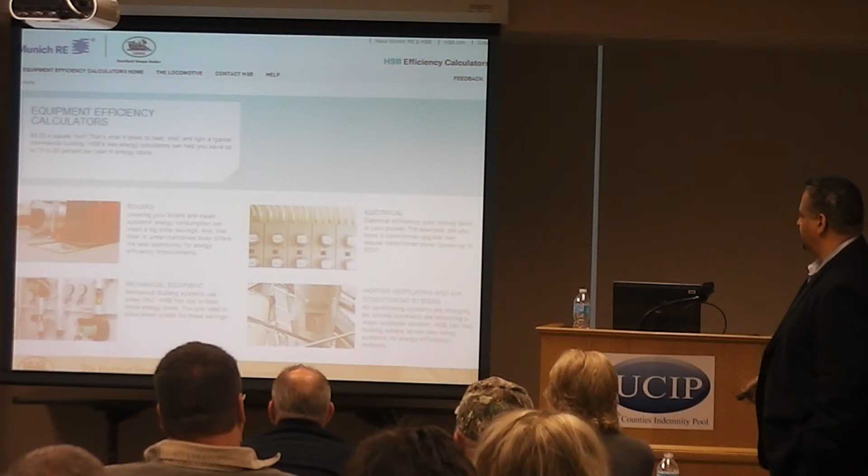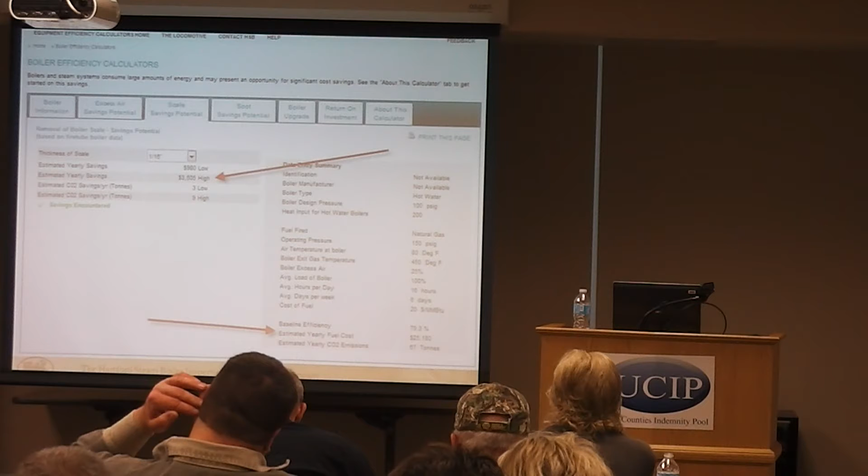And if you want to get some experience, just some idea of how much it would cost you, or how much you would save, you can go to one of our calculators and put in the information on the type of boiler you have, as far as fire tube, water tube, how it's being fired, on gas, on oil, whatever, design pressure, design temperature. If you fill that information in, you can actually start to see how much you might start to save just by knocking off the scale.

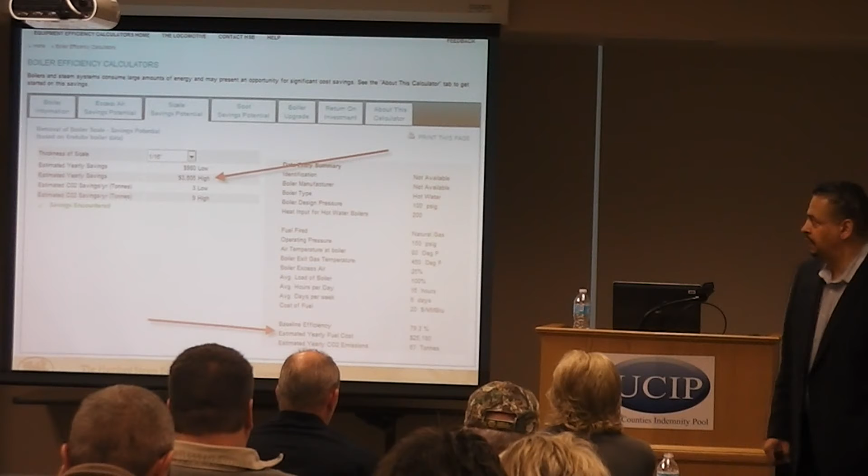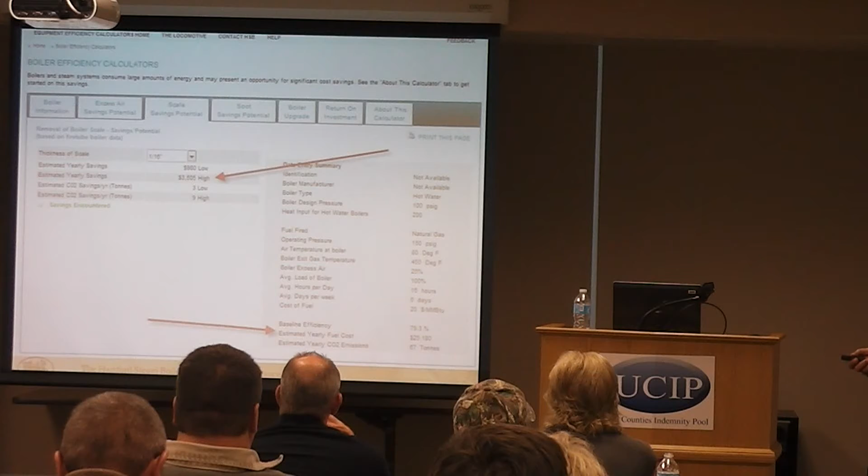All right, another type of failure: controls and safety devices. Some of our control and safety devices would be safety relief valves, low water cutouts. What else? High temperature limit switches, pressure switches if you have any type of steam boiler or anything like that.

Here's a safety valve. What's wrong with this safety valve? Remember all that scale that we saw on the tubes? That scale can also start to build up on the inside of the safety valve. Do we have proper over-pressure safety protection on this boiler now?

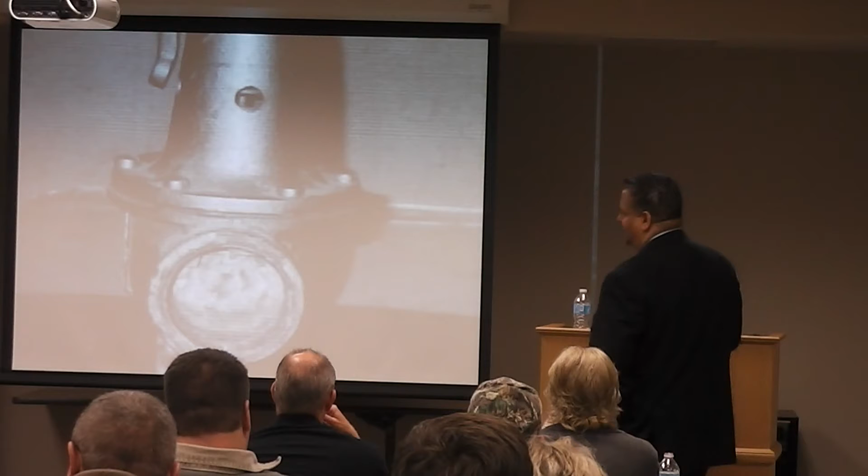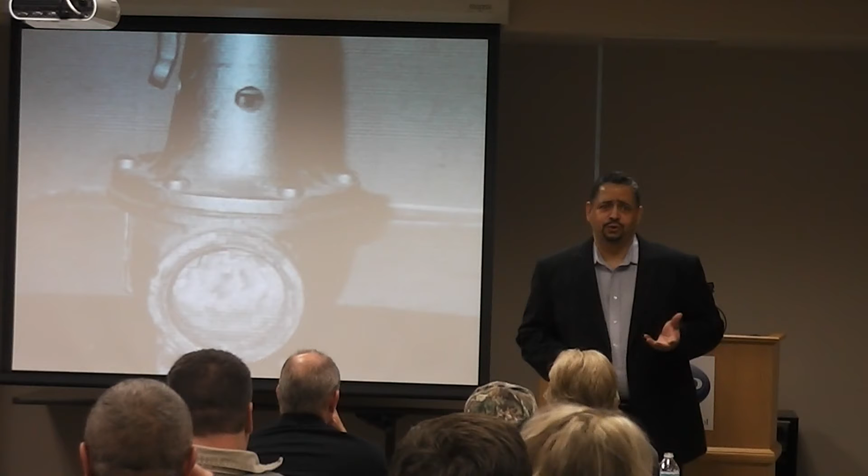And that's the one thing. If our inspectors come in and we do an inspection and we have some reason to believe that that safety valve is no longer operable, we're going to have to recommend that you take that boiler offline and replace the safety valve before you can bring it back up again. Because that is a serious safety concern. What kind of things can you do to try to help prevent that, to help minimize that?

Go ahead and pop that safety valve every so often. How many guys actually pop a safety valve at the facilities? Take the safety valve and lift it. We hear a lot of people say they don't like to lift them up, they don't like to test them because they never reseat. They start to leak after you pop them once or twice.

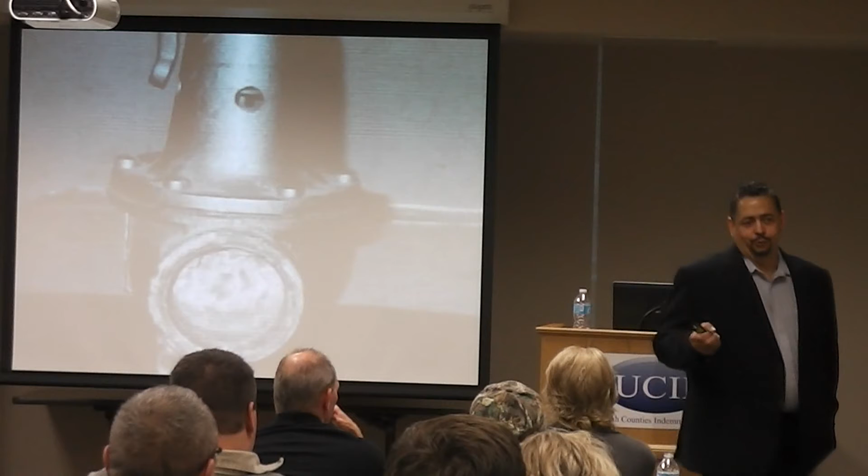Well, the reason it does that is because you never tested it to begin with. All that scale and crud starts to build up on the seat of the valve and the disc, so you don't have that good seating connection anymore. So of course it's going to leak. Well, if it leaked, it might not even work to begin with, right?

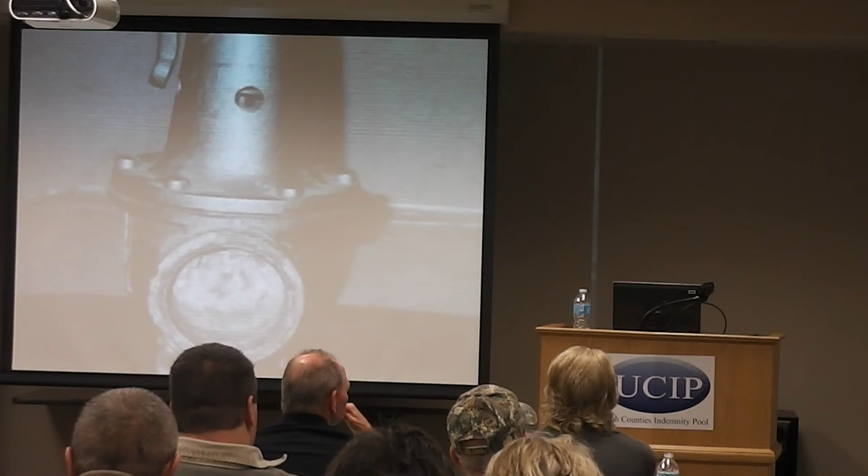How many guys have hot water heaters at home? You test those safety valves? When's the last time you popped those puppies? You said this weekend? It's kind of hard, but we recommend doing that. I recommend doing it like every 6 months. That thing can go just as bad - we'll see a video on that.

What's wrong with the safety valve? Well, what happened - we came in to do, we popped it, and it was leaking. We did the test on it, and it was leaking, and they told the mechanic to go down there and keep it from leaking. Well, they stopped it from leaking, okay.

Anybody recognize what kind of vessel this is right here? Yeah, hot water tank, hot water heater. Now, unfortunately, we had this situation happen down in Oklahoma City back in '82. It wasn't just like this - I mean this thing actually had a discharge line on it, and it was leaking. And the guy did the same thing - he went ahead and tried to keep it from leaking, and screwed a cap on it.

Unfortunately, something happened to the temperature switch, and this thing just kept building up pressure, and the safety valve tried to relieve itself. Now, this was at a school, in the cafeteria, and the whole tank finally let go right about lunchtime. And unfortunately, about 6 kids died from this.

So that's why, if we ever see any reason why a safety valve that we believe is not in operation or is not going to function properly, we will require you to take it offline and shut it down. These things are dangerous. I recommend, if you've got a discharge line - which you should have on these safety valves - point it off to a safe point of discharge. At the bottom of the line, cut it out at an angle. That'll prevent some enterprising young guy from putting a cap on it or something.

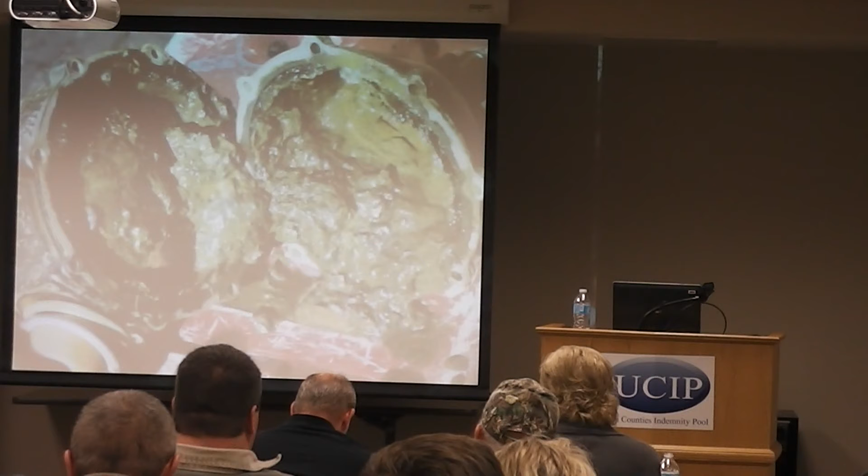Remember I told you about that low water cutout and how you're supposed to drain that ever so often? This is one reason why we like to drain those low water cutouts. A lot of times it's just an empty chamber with a floating ball in there, and this is what you can see can build up in here - a lot of sludge and a lot of mud. This is why the low water cutout device doesn't work. That's why we recommend, while the thing is running, while it's online, you go ahead and flush it out until you get some clean water out of it. Flush it out and actually test the shutdown feature of it.

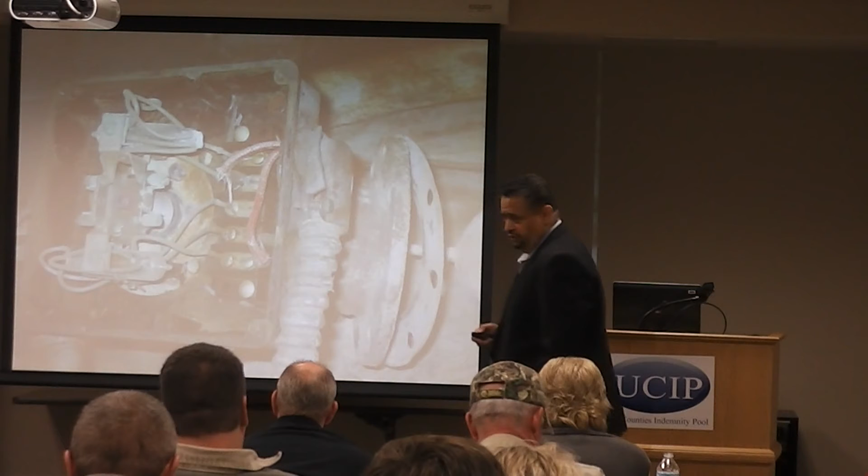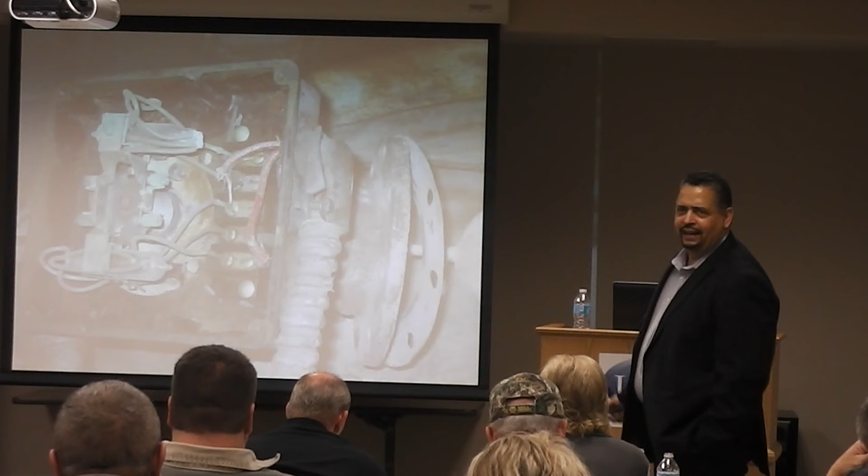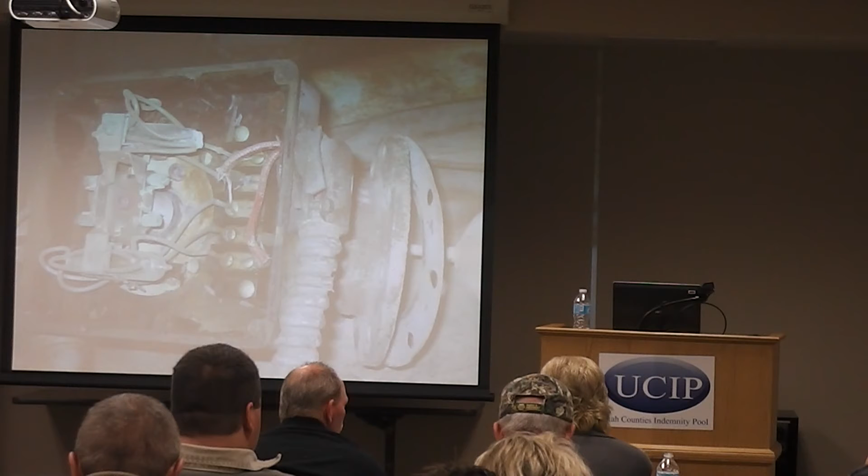This is the electrical side of the low water cutout device. What do you think? How do you think this one looks? A little crude. We want to make sure we've got the right type of wires for the high temperature application, and you don't see this too much. A lot of them now are micro switches, but these are some of the old mercury switches. If you have any of them like that with the old mercury switches, make sure the mercury's in good condition - make sure it's a nice, solid blob of mercury in there, not cloudy, not speckled all throughout the bulb. This is an older type, but there's still a lot of them out there like this.

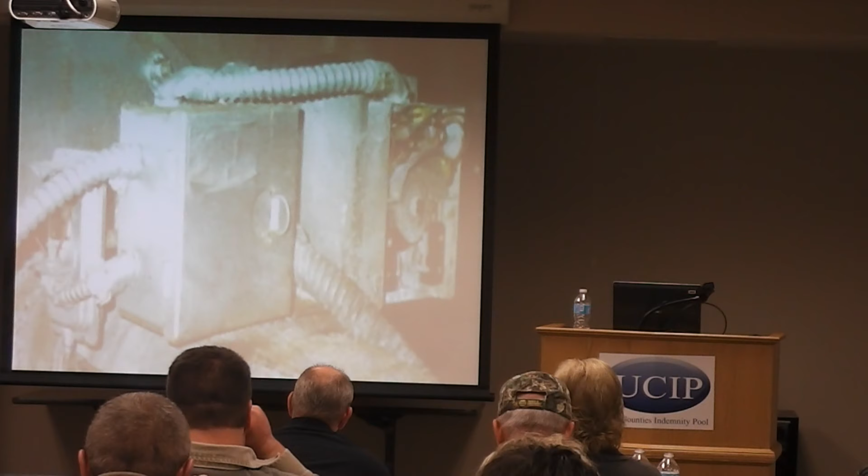These are pressure temperature switches. Covers missing - if you see anything like that, you definitely might want to go ahead and test that or replace it. You've got wires that are coming out of the connection box there.

All right, I like this one. This is the pressure switch. Can you see anything wrong with this pressure switch?

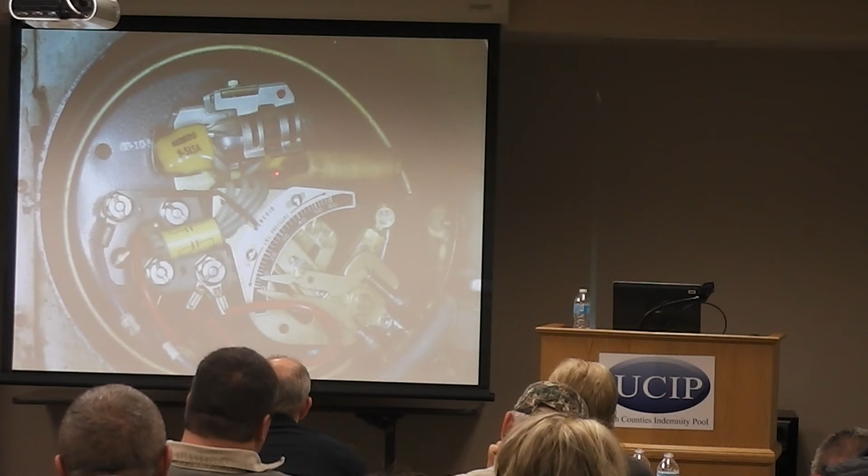Negative pressure? Something's on the mercury safety switch. Yeah, a piece of cardboard in there, okay? They were actually doing some type of maintenance and some type of test on this boiler, and they wanted to make sure it didn't trip off with overpressure or whatever. So to prevent that, they...

They actually put in something to keep it from tripping out, okay? Anytime you bypass controls it's never a good idea, because if they're left in there and you finally go to the inspection, that inspection might go a little difficult that day.

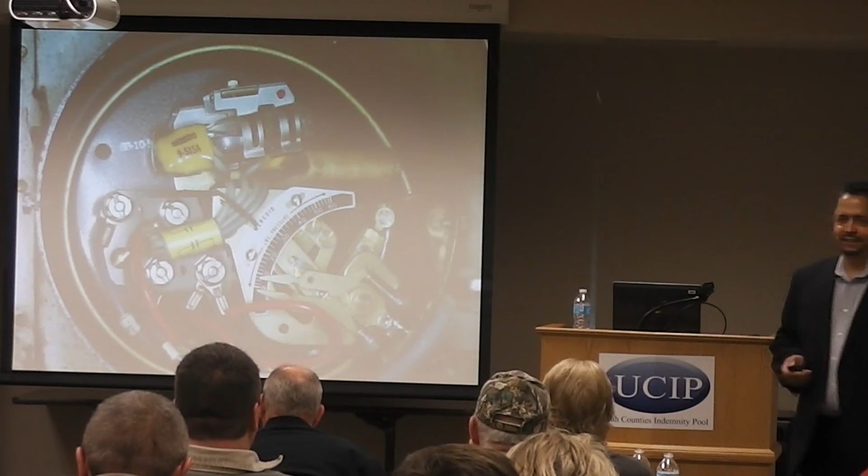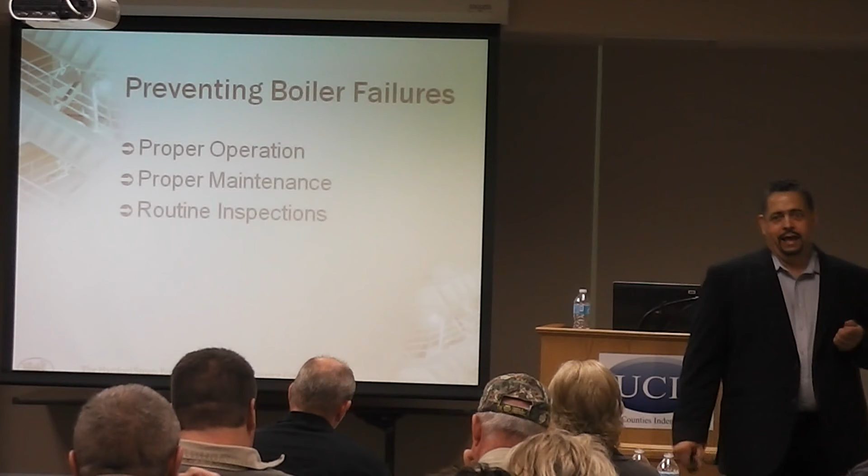All right, preventing boiler failures, okay? We make sure about the proper operation, proper maintenance, and routine inspections. If you operate these boilers in accordance with standard procedures, do the type of maintenance that is required, and have routine inspections, we can help prevent a lot of boiler failures. In this case, this is an example of it being operated improperly. Obviously the maintenance wasn't being done correctly, or was done incorrectly. And obviously the routine inspection - I want to give a disclaimer, we did not inspect this boiler, okay?

It wasn't HSB. Obviously the inspection didn't catch the things that were going wrong. Now typically, if you have a boiler failure, it's usually going to take a series of events to happen. It's usually not going to be just one device going bad that causes your boiler failure, okay? It's going to be a series of events. And that's what happened at this location.

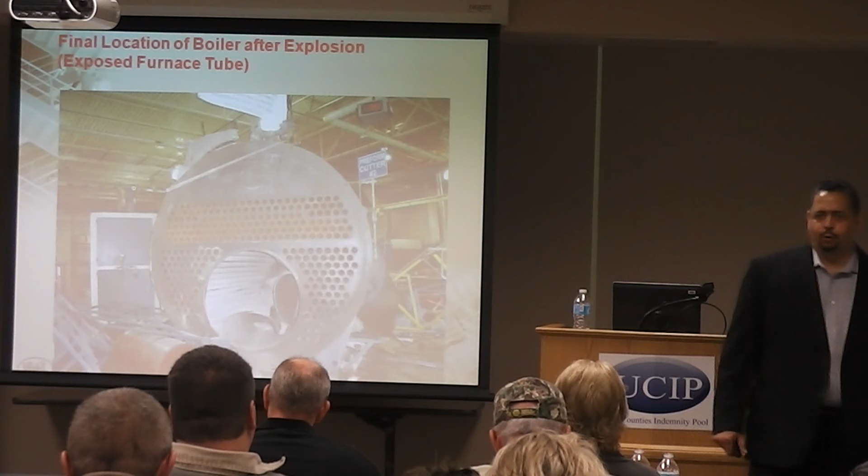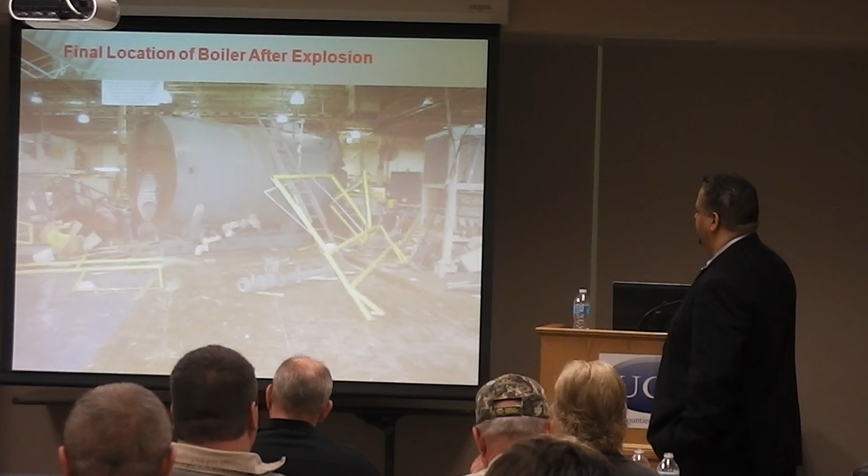Low water. Got that classic melting of the main furnace, okay? Unfortunately, you didn't just get a failure of the boiler, you didn't just get extensive damage - you got catastrophic failure. When that sheet actually let loose, and all the water that was left in there expanded to steam, this thing took off like a rocket and went into the adjacent room. It took down a lot of pieces of equipment, and it's a miracle no one was killed in this.

Okay, there's a boiler back there. This is the boiler room - this is where it's supposed to be, okay? In fact, this is the exhaust stack. So this is where the boiler started, and that's where it ended up at.

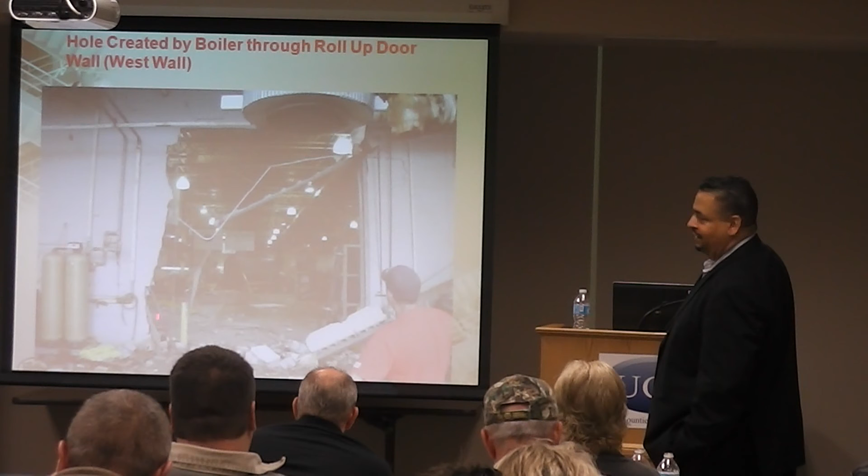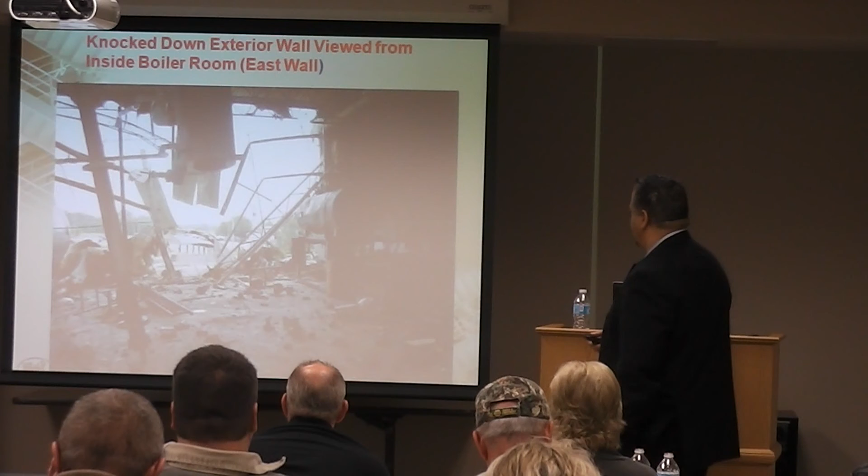You see, that's a pretty decent sized hole knocked through, okay? That's the outside wall of the boiler room. And this is looking at the outside of the boiler room from the east side. So you can see it actually took the outside wall down also.

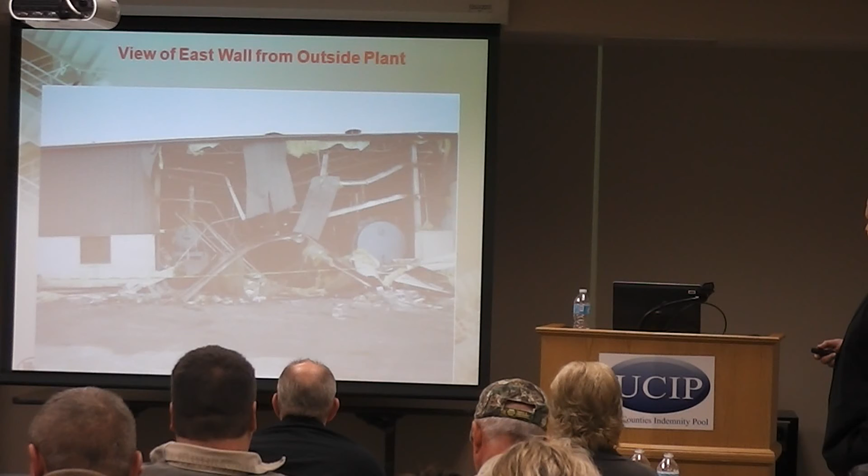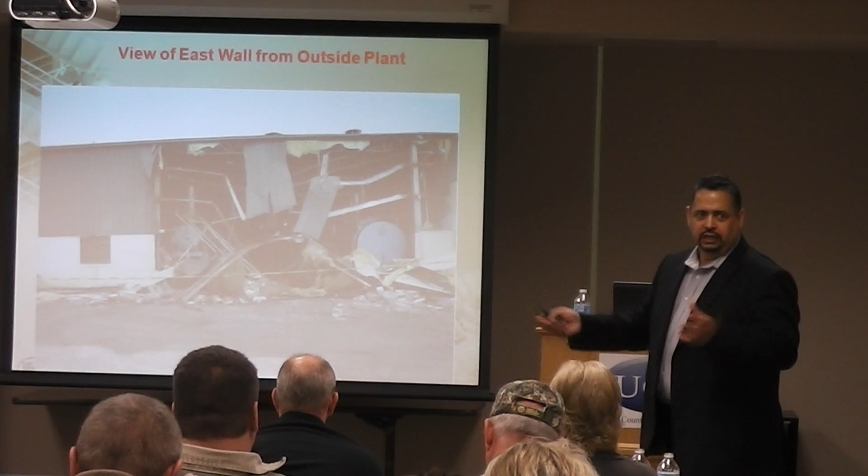Basically what happened when the boiler let go, that back furnace door went one way and took out that wall, and the boiler went the opposite way and took out the opposite wall. There's a sister boiler right there - take a look at that back door on this one. This is not the one that failed, okay?

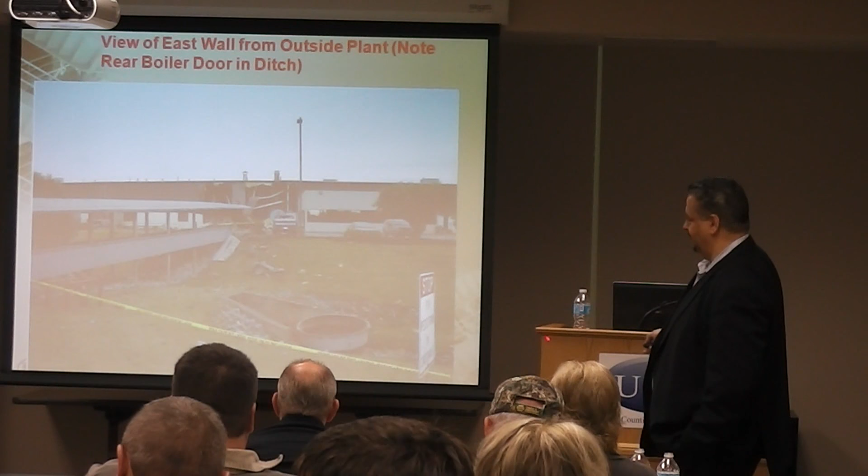There's the back door of the one that failed. There's the boiler room, and there's the back door there. So you can see this thing kind of took off and landed several hundred feet away. Like I said, it's a miracle no one died in this. See how thick these walls are right here.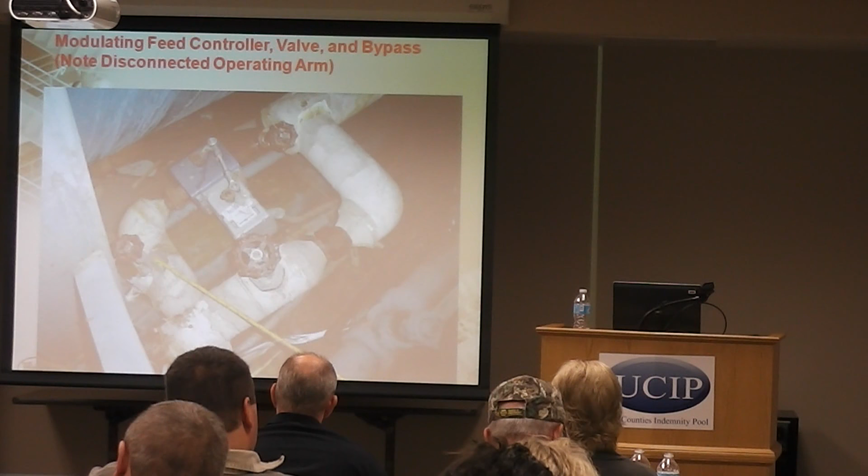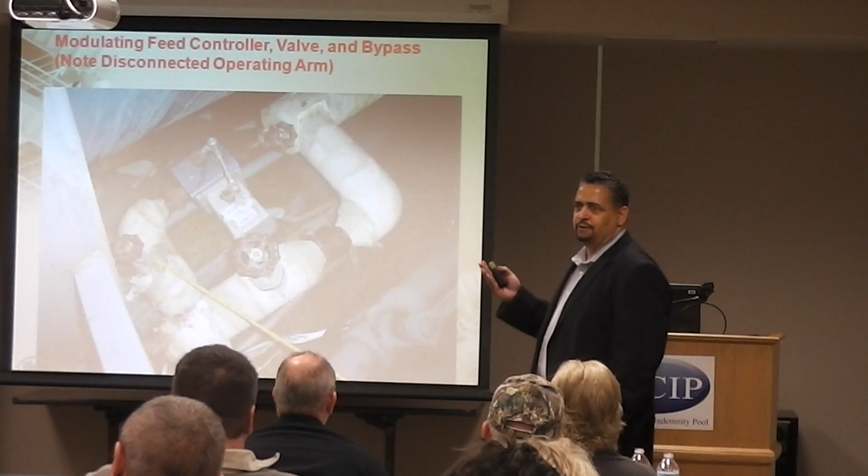Earlier we talked about proper operation, proper maintenance, proper inspections. Well here, they weren't operating the boiler properly, because these boilers operate automatically, okay? As the water level goes down, it's supposed to automatically call for more water. Typically on these size boilers, you're going to have about 2 low water cutoffs - one to turn the pumps on to bring water into the boiler, and the second as a backup to actually turn the fire off when water gets too low.

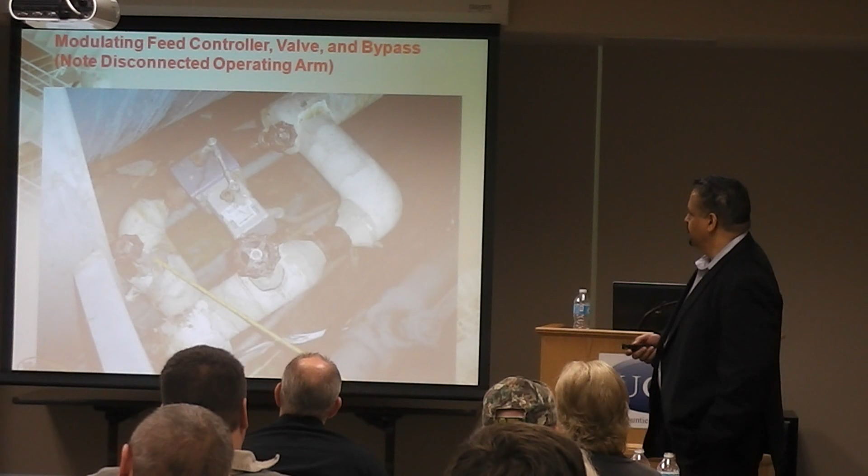Now, for some reason, they were having problems with the automatic feed level coming to the boiler. And this is the...